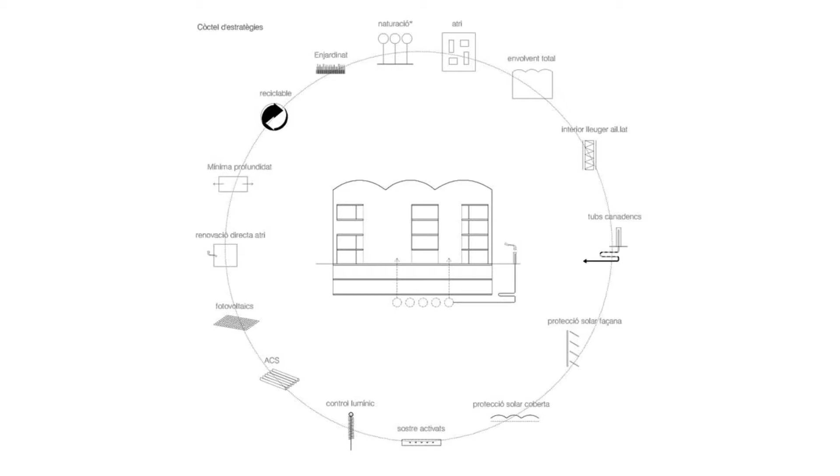I agree about that, but I think we are not concerned about sustainability because we introduce in our approach the idea of life cycling or low-embodied energy materials, that we do, or that we use passive or active strategies to gain, that we do. I think our interest in sustainability is based not in these topics, which are obviously necessary in that kind of approach, but we are concerned about sustainability because we understand architecture as support for living.

The use of architecture is the first strategy in terms of sustainability. It's not the object itself. The objects are sustainable or unsustainable not because of the object itself, but because of the use that we get from the object. Okay?

So this is what we are concerned with: how we use architecture. And this is why we are concerned about sustainability. Because an object can become very sustainable if you use it over a larger period of time, or if it's used by a lot of people, or if it's used in a second life. So these are three examples about why sustainability is not about the objects, but about how we use the objects, and how we use architecture.

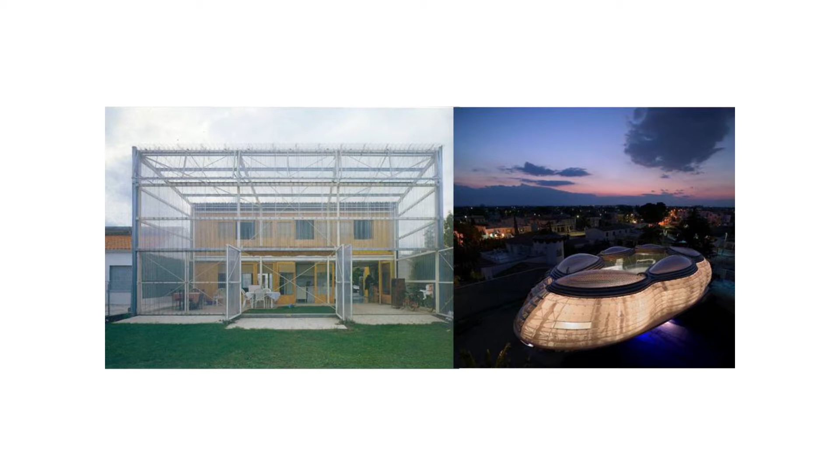So all those examples, I think, are questioning those topics about habitability. And of course they are talking again about sustainability, but this is just a consequence. What is interesting is that we have to question ourselves about how we live in our buildings.

So I've shown you this picture on the left side, which is from Lacaton & Vassal again. When I explain what we do at the office, I use a Lacaton & Vassal concept, which is that we try to offer a large number of spaces which are specific in terms of conditions, not in terms of use.

So houses or public buildings that offer different kinds of spaces, but not specialized spaces. Special, but not specialized. The difference is incredible.

There's a sentence from Lacaton & Vassal which said something like, function compromises freedom of use. So two classical topics of modern architecture: functionalism, and the idea of program as a strategy to design. From Lacaton & Vassal, this is against freedom in the use of the spaces.

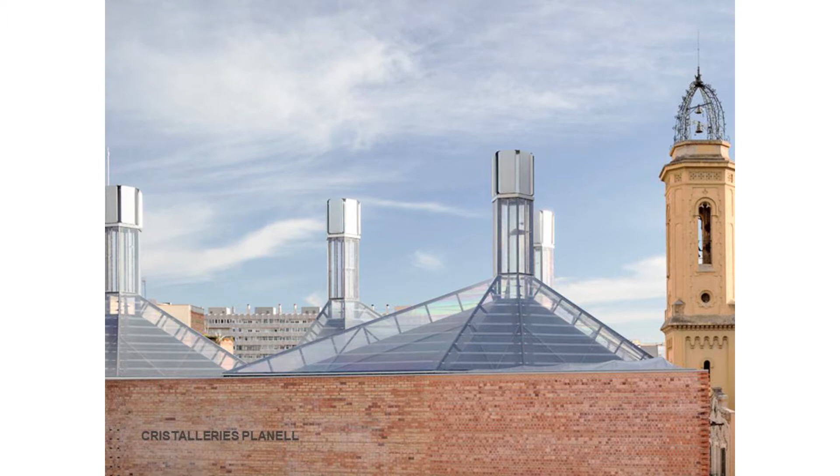The first of the projects is this, the Cristalleries Planell. This is an academic school for adult people. It's a public building, very small, placed in the center of Barcelona in a terrible plot, because it has a difficult geometry, a narrow triangle that belongs to an old huge factory, but the factory was like 10 times bigger than that final plot that has ended up here between the new streets.

To explain deeply that idea of how to give conditions to the air, let me explain the basic strategy of the building. This was a competition in 2010, and our strategy was very simple. There were just two conditions: the plot was a triangle, the program of course, and you had to take care of an old facade that was part of heritage—this old facade of the factory.

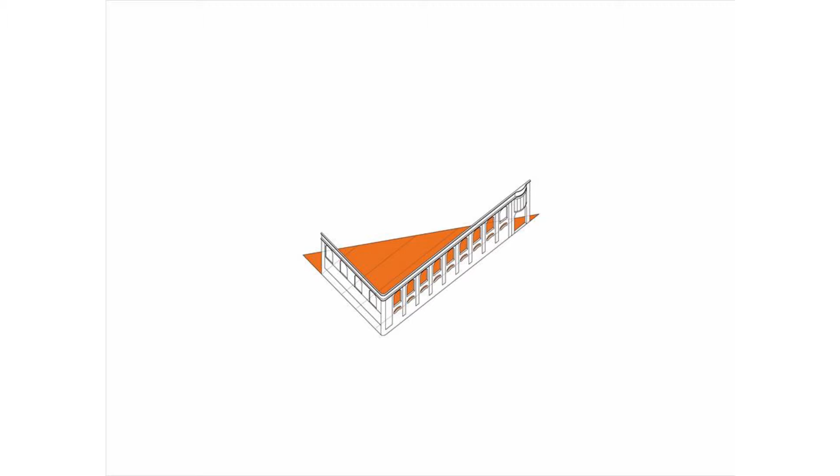That facade covers 2 of the 3 facades of the plot, so it's difficult to deal with. Why so difficult? Because the program of the building is basically classrooms, and classrooms need natural light. The old facade covering the main south-facing facade has holes that belong to a factory with an industrial logic, so it's very difficult to mix with the needs of classrooms.

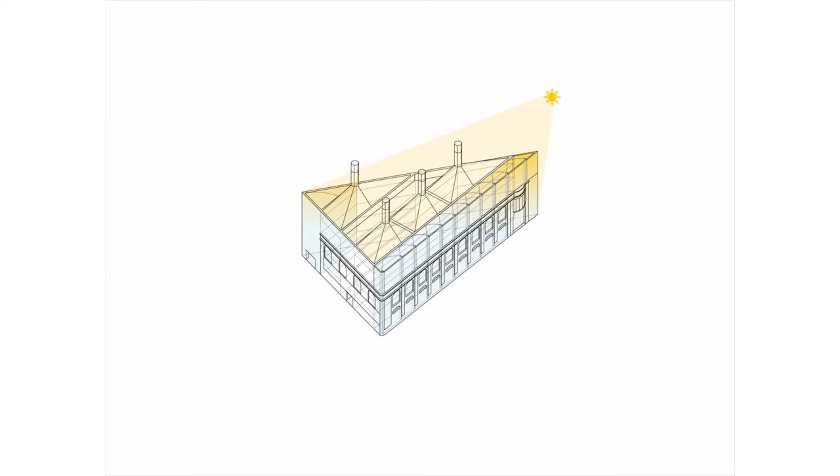That's why our basic strategy was to step back twice and let a patio sit between the old facade and the new classrooms. This patio was just to get more natural light from the ceiling, and also to mix the two kinds of holes that were on the old facade. After that, we decided the patio would be transformed into an atrium.

The difference between the patio and the atrium is that the atrium is a natural system—in wintertime, as we have a lot of internal heat from adults in small classrooms, in terms of heat and also smell, this becomes natural heating. You are natural heaters, so the winter strategy is to stay close and get fresh air from this atrium, which acts like a greenhouse keeping the air a little warmer.

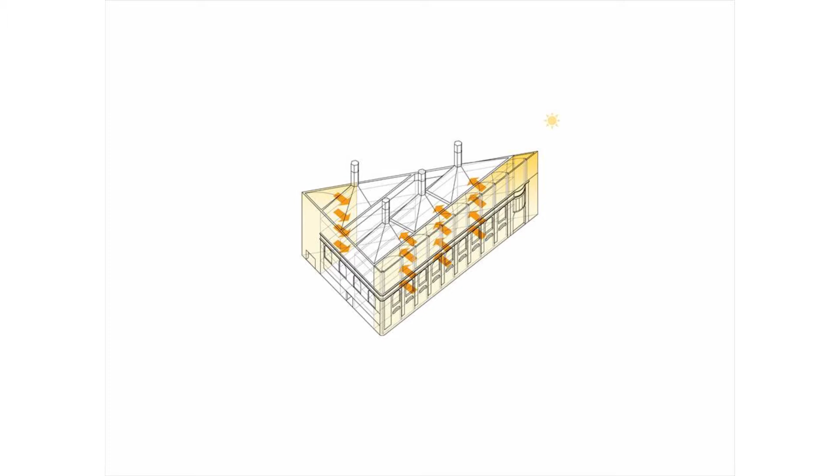In summertime it's the opposite—you have to move a lot of air because the internal heat has to be avoided and taken off from the building. So basically, the strategy of the building—you'll see the shape and geometry is very Euclidean—but in fact it's about giving qualities to the air: qualities in terms of movement, direction, temperature, humidity, and also natural light.

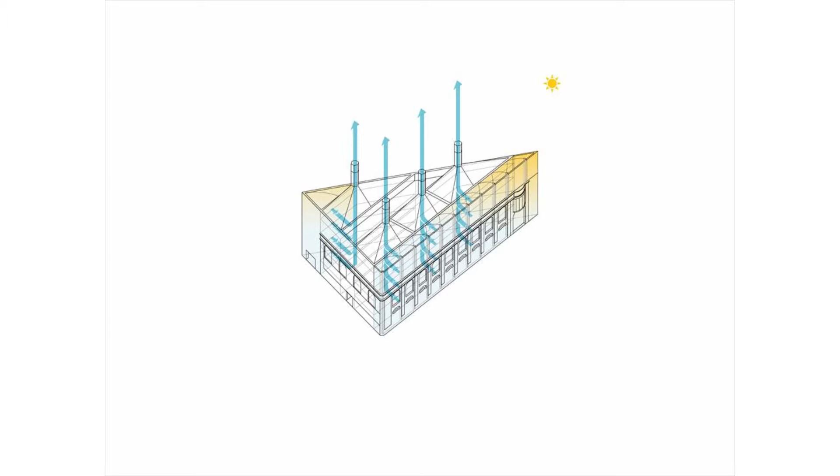So time, as I was talking before, how important time is, can be explained in 4 parameters—4 vectors, sorry, I have to be serious in front of engineers. The first vector is time as use. The idea of use is impossible without time. We use buildings, we don't use sculptures. Well, not all the schools of thought agree.

You know the sentence from Dalí about a sculpture—well, at least a sculpture cannot be moving, that was Dalí's view. Calder, you know Calder, the sculptures from Calder that move? Dalí sent him a letter saying, please don't let your sculptures move—at least what you can ask of a sculpture is don't move. So, sculpture is not about time, but buildings are about time.

So what is the use in this case? The use is about flexibility in terms of future. This is a public building. During the process from the competition to the final project, the use changed—at the beginning it wasn't a school for adults. So our basic strategy was to develop a public building, not specifically an adult school, one that can be transformed in the future.

That's why we put the structure in one sense, not in the other—just a middle corridor, which is the easiest way to have access to the maximum number of programs and so on. So the building is basically that pattern of administrative part and classrooms, repeated on every floor.

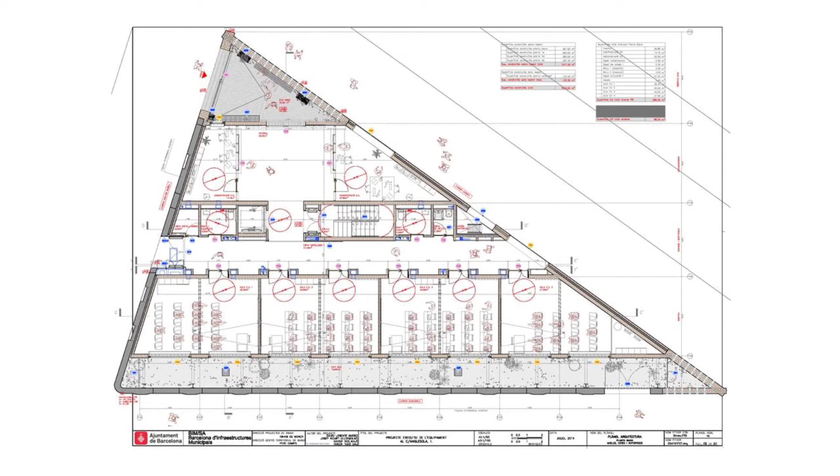Well, this is not really important, but time is about use. In this case, it was important to make all the users understand that they were not the important part of that building, because this is a public building for everybody, not only for the specific users who will be here for certain years—maybe just 10—but a very heavy building that will be here maybe for 100 years.

The second vector for time is the obvious one: time as memory. When you talk about time in a case like this, dealing with heritage, something from the past, you have to talk about memory. But for us, to talk about heritage, something already there, is not to talk in terms of culture—it's not about composition or cultural or historic values. It's to understand how useful this material already is. You have to do the calculation necessary to understand if this old wall is still able to support something, if the wideness of the wall gives us something in terms of inertia or humidity control.

Okay, so that's our approach to heritage. Of course we also have an approach in terms of culture, but the first and obvious thing is to understand that in terms of embodied energy, this is energy embodied in that material that can be used again. So we have to understand this not as a cultural example, but as a structural wall.

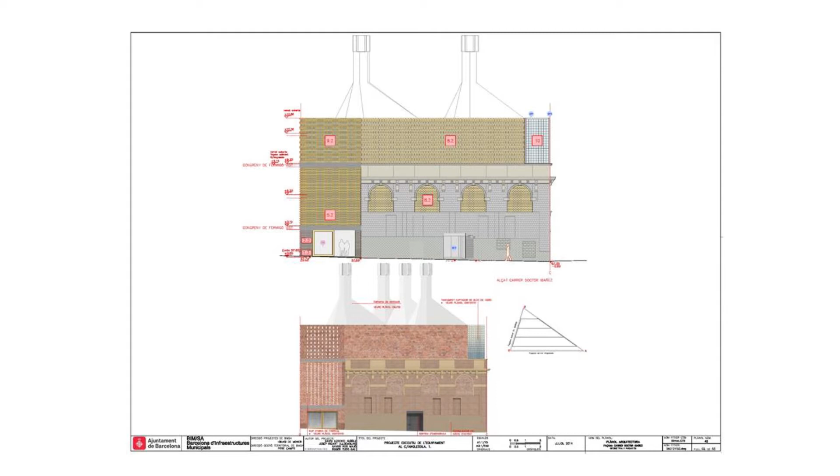So what we did in this case was to see if the wall was still able to support another floor, how wide it is, and how it will help that patio to give inertia and control humidity, how the holes were in terms of natural light, and so on.

So we are using the wall not as a sculpture, but as part of this patio, which is the basic strategy in terms of thermodynamics and comfort of the building. Working as a greenhouse, working as a mass, and also as a structure.

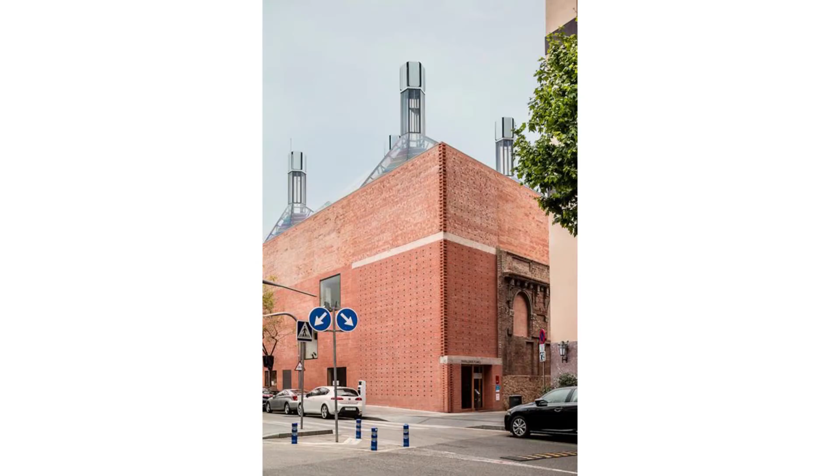Time is performing. Time is about performing. This is difficult to explain, but for us it's the basic and most interesting part of that kind of strategy. So the structure not only performs supporting - the structure, in this case, performs giving shape.

This is structural walls. This is something very uncommon also in Spain. I suppose in France it's very uncommon too, especially in a public building of 4 floors. It's not really common, neither in Spain. But this is a very good strategy, thanks to the structure - at the same time that you're supporting slabs, supporting program, you're giving shape to the spaces.

But in this case, you're giving shape to the air of the patio, but not only the patio. Also the structure decides the geometry to allow the pipes for the air that go to the roof and come from the basement, and so on.

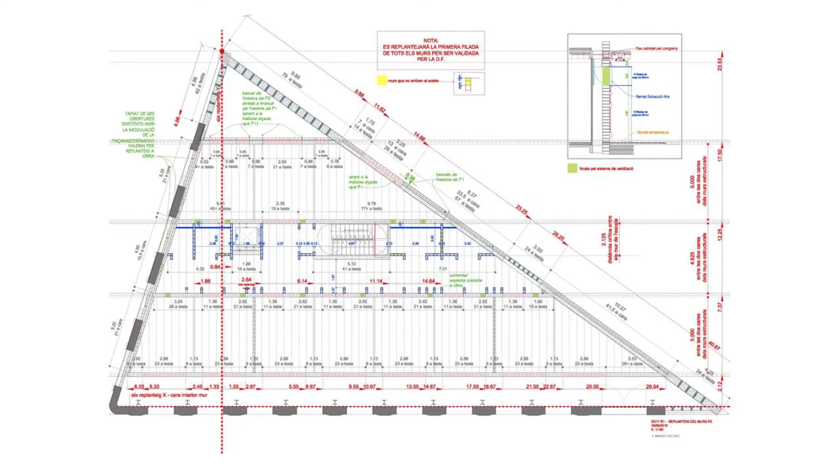But also the structure, because it's a massive wall, as used to be the old factory, is giving inertia, it's giving conditions, it's qualifying the air. Inertia is that incredible invention that assumes the excess of heat and gives it back when necessary. But it's the same in terms of humidity, if the product you're using has pores, like wood, like bricks, without any kind of coating.

But also the structure can perform giving shape to the pipes, to the installations, and also giving inertia in the slabs. Because when you're talking about these thermodynamical strategies, when you're using massive walls to control comfort, you have to assume that you cannot coat, that you cannot hide that kind of walls.

So the installation is going to be seen - something that is not happening here. All the installations are hidden, isn't it? So are the ceilings, the roofs, and so on. In that kind of building where all the mass helps control comfort, then the installations cannot be hidden.

But then you have to assume that as an architect, as a designer, you have to design the shape, the aspect, the look of the installations. And this is something I have to say to you is impossible - forget trying to control all that. What you can try is to give patterns, to give instructions.

That's why we did that kind of bizarre slab, because that shape hides it in a visual condition. You see the classroom and the basic pipes get a little bit hidden, but it gives clear instruction to the installer. We gave them just instructions: the first corridor is for that kind of pipes, the second is for that kind of installation, and so on. So instead of giving final shapes, we gave them a pattern and instructions, like a game.

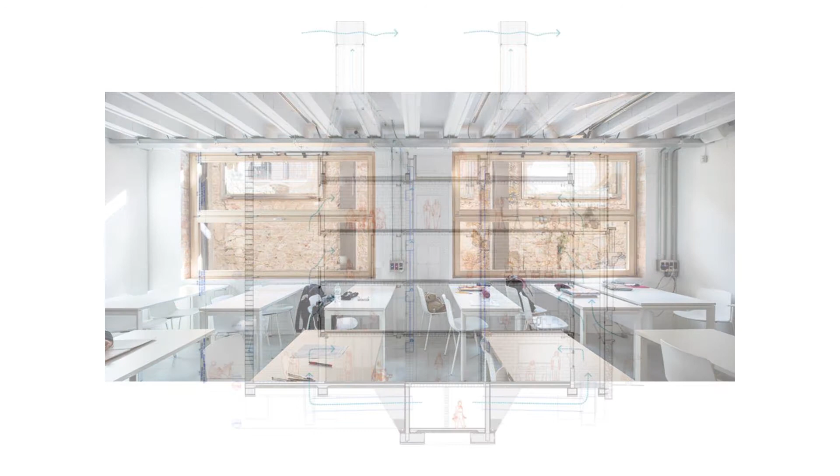It works pretty well. Okay, so that's the basic performance of the building. The air comes from the basement very slowly - let's take it very slow. It's a slow air, it's like slow food, it's like everything has to be slow. You know how we Spanish are, isn't it?

So take it easy, okay, it's a take it easier system. Does it mean that when you work not with pipes, but with the spaces as the way of the movement of the air, you don't have the feeling of movement, okay? Which is far more comfortable than to have the feeling of a rush of air from a pipe. You know what I mean?

Okay, so this is about windows, not about holes. This is about the space, not about pipes. So the air moves from one space to the other, always getting from the inertia of the concrete walls, the basement, the old walls, or all the structural walls, getting conditions in terms of temperature and humidity.

Of course, with that passive system, it's not enough. In certain days of the winter and in certain days of the summer, just with the pure inertia, it's not enough. So the pavement is an active pavement based on geothermal energy that gives the point of heat in winter and gives also the point of cold in summer, okay?

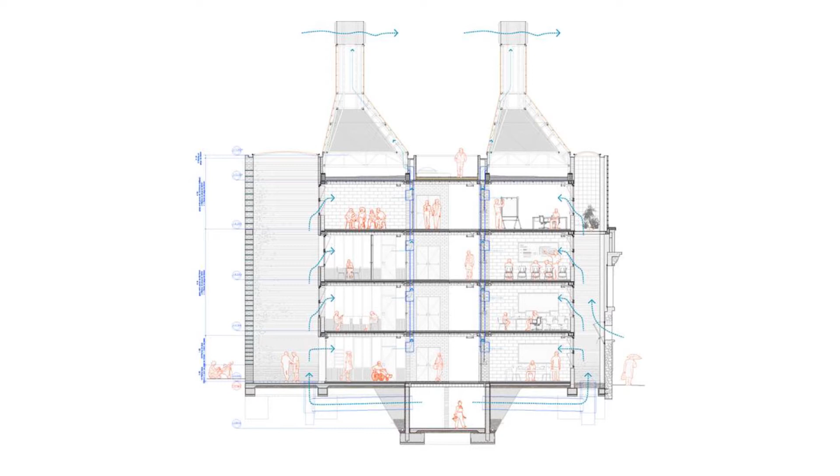That means between 9 and 11 times per hour, all the air of the classrooms is in movement, just with a natural engine. This is a complete natural engine based on 3 different systems.

The sun chimney, which is a physical, very easy concept to understand. If you come into YouTube, you will see very simple, funny inventions to do sun chimneys with your sons. Do you have sons? No, I have sons.

So it's very simple as a concept. What's very difficult is to check if it's possible to move the air 11 times per hour. The concept is up to the architects - it's possible because the concept is very funny.

I want to move a lot of air in summer. But in winter, what I want is to keep you warm inside the classroom. So in winter, I just want to move the minimum possible. The sun chimney is a perfect invention because in summer is when it works, when it gets really hot.

And the depression is incredibly strong and moves lots of air. But in winter, there's less sun, the sun goes lower. So in winter, the sun chimney works like shit, but that's perfect for the project because in winter I want you warm into the classroom, okay?

So as a concept, it came from the architects, but as a simulation, as a calculation, as a process, it came from the engineers. Not all the engineers are like demons - there are fantastic engineers that want to recover for architecture, for natural comfort, tools that traditionally for them are being solved by machines.

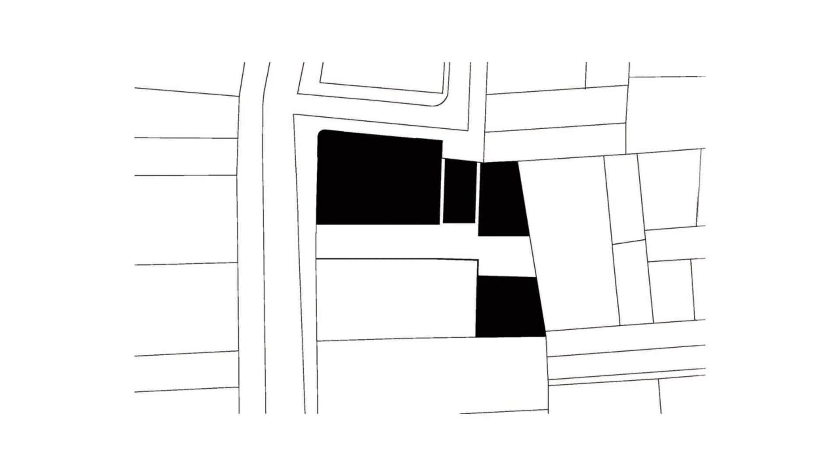So what we discover here is that part of the structure, part of the original spaces, are less useful than others. So we demolish this part, trying to create like a street into the building. But it's not a street, it's an invention that performs in terms of passive strategies, qualifying the air in terms of natural ventilation, cross ventilation, temperature, gains of the sun, and so on.

So this is a drawing from the competition explaining how we keep part of the building and how we demolish part of it, giving new conditions, keeping the old conditions for the spaces that are still useful, and getting new conditions with this new street that crosses the building. It works like a greenhouse and so on.

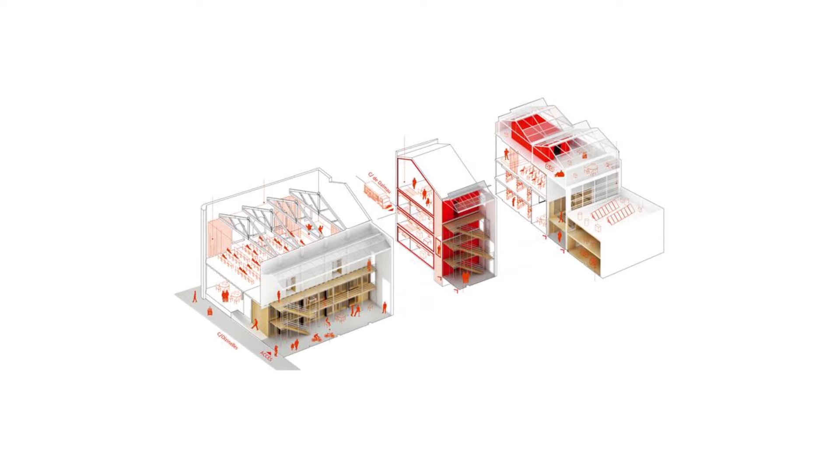So we get that part for the non-program, for the unexpected, but it's very clear in terms of passive design, because it's a natural engine that moves the air to the top, giving fresh air to the whole building. But in terms of program, it's the unexpected, assuming a new way to put in order all the circulations of the building.

Thanks to that new way of circulations, the old parts that we keep there get cleaner, because the circulations are out of the old parts and are assumed by this new street.

Because this is a demonstration that urbanism is from bottom to top. When a building is a real complaint from real people, when it's 40 years of people asking to recover that building for society, then the success is for sure.

It doesn't matter how necessary the program is or how necessary the rehabilitation of a heritage building is, if the decision comes from the top down, it never works. This is an example of success.

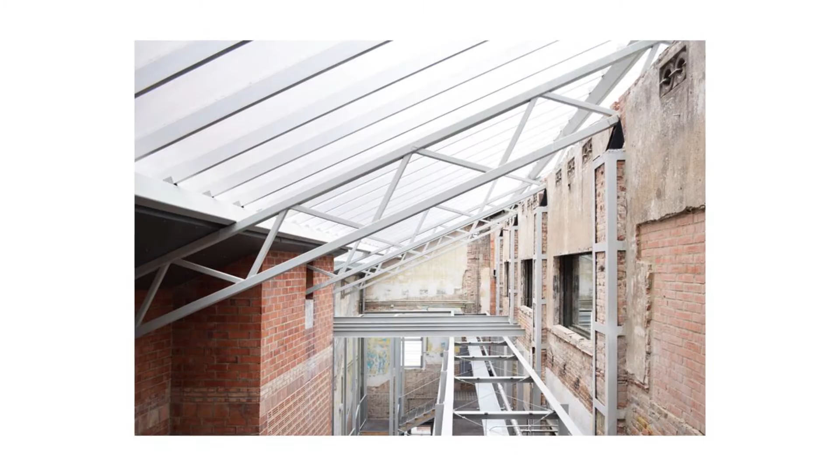That's the ceiling and so on. Well, that's the old part, what we keep there, just trying to take advantage of the original conditions.

So that's the opposite a little bit. On one side, new conditions for the air, thanks to the strategic demolition, and on the other side, taking advantage of the original conditions of that kind of walls, again, inertia, and so on.

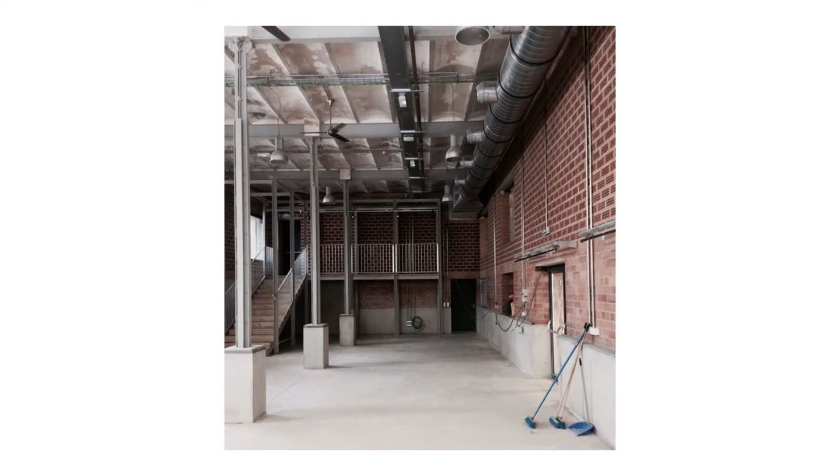To assume it's a very old-fashioned structure, we've done the calculation. We have assumed the risk to say that the old structure can stand up with certain new structural parts, but it's basically the original structure standing up the new program.

Okay, that was the first strategy. Second one, which gives the title to the presentation, from elemental to fundamental. What does it mean? This is not our stuff.

This is, for me, my favorite building in Barcelona. If you never came to visit us, I give you that advice, to visit this, which is the library at the UPF University.

It's also an open building, you can visit anytime you go there. It's a very old building, just an infrastructure to keep water, it's like an infrastructure, okay?

Now it's a library, the library of the UPF University, close to the Ciutadella Park. It's an amazing building. It's that mix between an old brick infrastructure with that new lecture done by Clotet Paricio, which are a pair of very good architects.

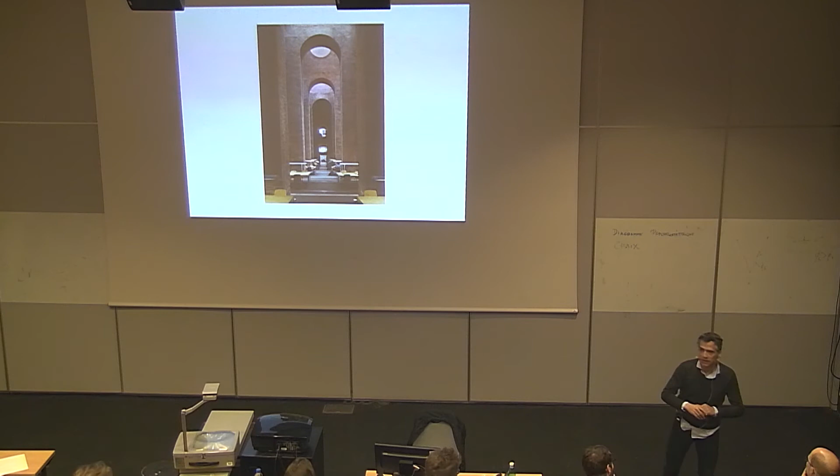Why do I present that image? To explain the idea of what I call going from elemental to fundamental. I don't know any designer, whether industrial designer, architect or engineer, who doesn't assume that in a design process you have to consider as many inputs as possible, all the demands and all the availables possible.

What does that mean? At the beginning of a design process, you try to understand and put together what the customer is asking, the program, the norms, the laws, the budget, the conditions of the soil, the conditions of the climate.

You also try to understand all the availabilities, the resources, the advantages, the opportunities. This is what we try as designers to do - a very complex, strategical process where you put together all the demands and all the availabilities and try to figure out what strategy can put it all together and solve the demands.

What I think is a very common strategy in all our projects is, assuming all that, to try to give the answers - I don't like the word answer, but let's say that - using just the basic parts of construction.

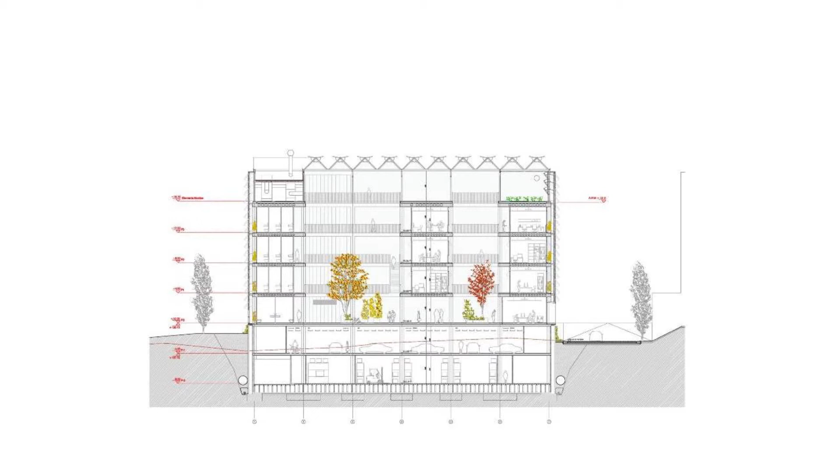And on the inside is just a concrete structure. So basically, all the building works in a passive way. The whole building works in a passive way, so all the intermediate spaces, which are meeting spaces, free program spaces, are just passive climate design.

That means there are lots of secretary people, administrative people who work here, who really hate us, because to go to the bathroom, sometimes it's not as warm as it should be. But we assume that we are not the kind of architects that can give all the level of comfort that people are waiting for. It's impossible. So we have to assume that there are some uncomfortable moments, not spaces. There are moments of uncomfortability.

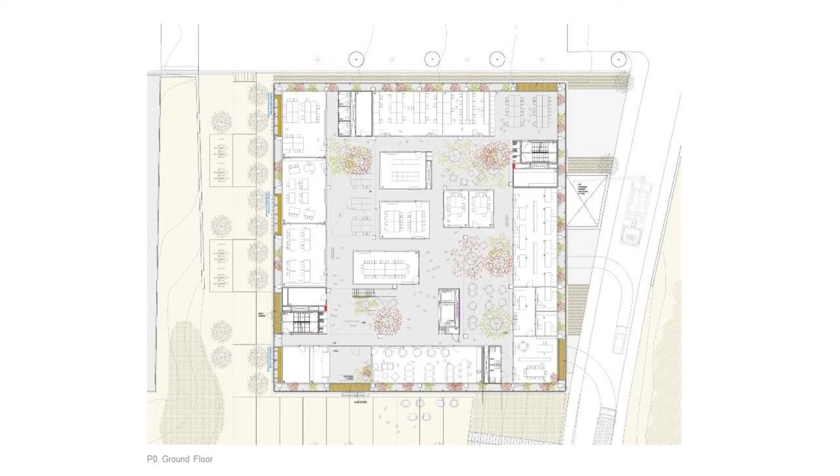Well, all the parts that need an extra level of comfort are the non-dynamic spaces, which are in the boxes of wood that have a level more of comfort with active systems.

So the strategy is again very simple in terms of thermodynamics. In winter, the greenhouse has to be very closed and works as a greenhouse, getting gain from the sun from any of the facades. So through CFD simulations, and with natural engines like the roof, the corridors and the basement, we move the air in a natural strategy, taking it from the hot facade and putting it in the colder spaces.

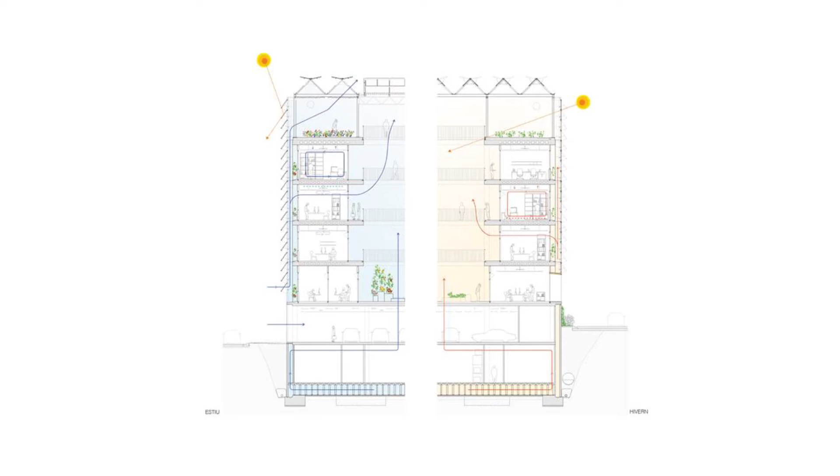This is very natural, the air by itself tries to compensate, so it's not really difficult. In winter it's a greenhouse working as a greenhouse. In summer it's the opposite—it's like a porch, like a shadow. The whole greenhouse opens with an industrial system, repeated every meter, to open the whole facade and move as much air as possible.

So the two parts are clear: the structure and the enclosure. The structure here is something forever, based on concrete—it will be here for ages. You have to assume that concrete, in terms of environment, is not good. A lot of CO2 in the process.

Really heavy. But like the old car that I showed you, the Chevy, the big car in La Habana, it's as unsustainable as the concrete. But it's been in La Habana for 70 years, so every year it's getting less and less unsustainable. It's the same for concrete.

If you assume that you have the concrete, what you have to ask the concrete is to perform as the superstructure—it has to be there for everything, so it's not just the structure. Lots of inertia, a 40 centimeter slab. But as it's a 40 centimeter slab, it's too heavy.

So we put pipes inside, which take off some heaviness, and at the same time, through these pipes, we can take off the heat, not only on the surface but also inside. And at the same time, if opening the windows isn't enough, fresh air also moves through these pipes and goes to all the offices. At the same time, with the shape of the surface, you get better acoustic conditions. Everything is in the structure, in the important part of the building.

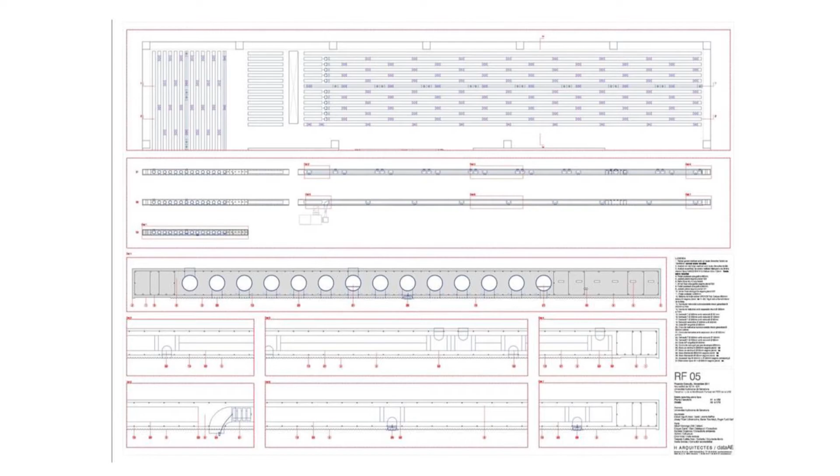So also the active system—the pavement is also active, and the slab is also activated with hot water and cold water. That's the pipes that are inside the concrete. That's the cheap way to give shape to the concrete, because it's a very basic structure, a very cheap concrete structure.

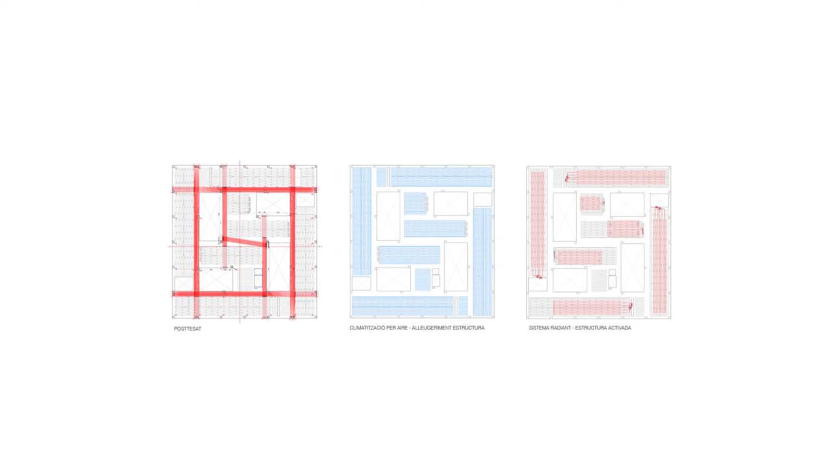Full of, we're asking to perform in a lot of ways. So that was the super exciting moment in the process. That was like being in a futuristic movie.

Every day, people taking sizes to put the post-tensioned system in its place, the pipes. You can see here all the pipes for the heating system, for the cold system. Well, it was beautiful, an amazing moment. For the structural part, suddenly something which is just a concrete structure that is hidden, I don't know where, suddenly becomes everything, giving conditions to this space. This intermediate space, the quality of the air is based on the qualities that the structure gives to the air, in terms of active and passive, acoustics, everything.

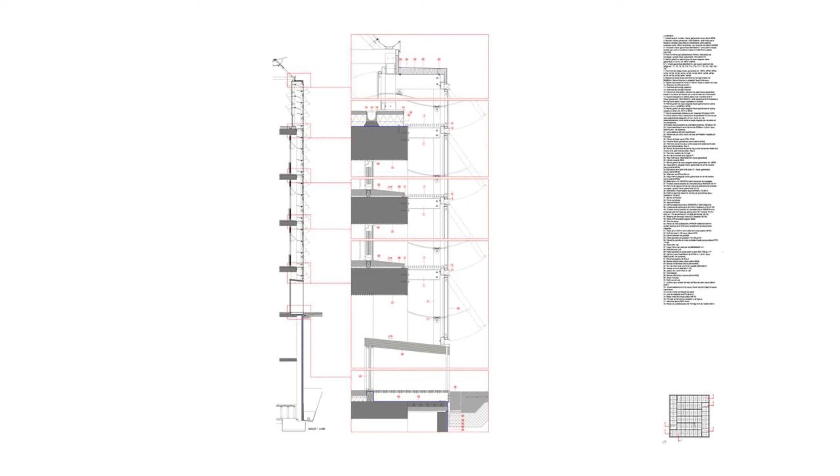The second part is the enclosure, the greenhouse system, which is that skin that surrounds all the section. I insist, catalog system, but reviewed. Because it's not very common in greenhouses to have the same window system one over each other. But it's as simple as just repeating it.

The greenhouse culture is amazing because agricultural is not about thousands or millions of euros. Agricultural is about taking advantage of 1 cent per hectare. So they have to be very smart. They've shown that they are smarter than the rest of the people. The greenhouse systems from 20 years ago already have domotic systems, very cheap domotic systems, to close in case of rain, to open in case of temperature, and so on. Already now it's difficult to get that kind of windows as a building product, which is very cheap and very affordable in the agricultural world.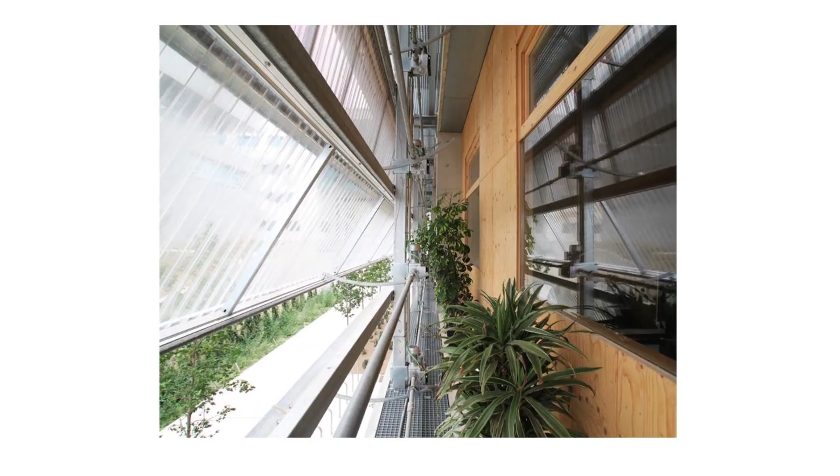Solid matter. At the very beginning, another common place when we were young was that interest about that kind of architecture that identifies, that makes the same between a structure and geometry. We call that structural space. But this is as clear and as classic as all the architecture based on structural walls. And a structural wall is a very nice example about how the structure is the same as the space.

We were very interested about that, but it doesn't mean to solve all the structures with bricks. It means to solve the structures with the structural bidimensional elements.

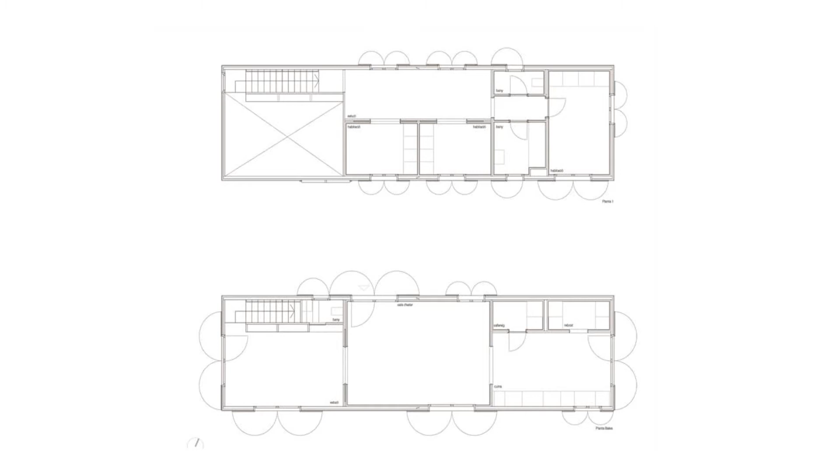So here is where we discovered the program, like this. But thanks to that product that we discovered at that moment, that is far better known in France than in Spain - by that moment, 10 years ago, it was really hardly known in Spain - which is the CLT panels, timber panels, structural laminated panels. So we did that house from the top. So what I put as an example is that we're interested in that strategy, but that strategy is not about one material. It's about that concept to identify structure and geometry. So it can be done with wood, but with a certain product.

This is the second example. This is made in brick. This is a commission that we got at the very beginning of the economic crisis, by 2007 - like 10 years ago. Typical pair, we thought, both of them with nice jobs, no sons, with a flat in property, happy.

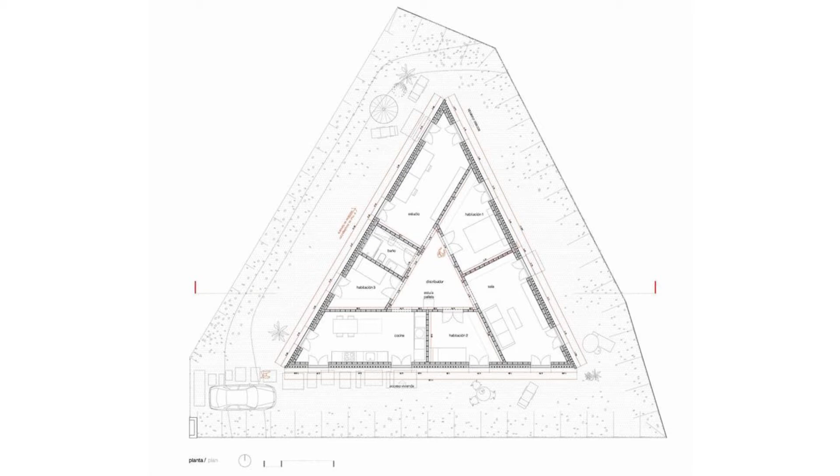They got that new plot to build their first house. They had an apartment and they wanted a new house. So it's supposed that what happens here is that they ask us not for the house that they need, but for the house about the family that they want to become. This is very common - people don't ask what they really need, people ask what they imagine they will need. One day, just based on real interviews, the average in Barcelona, like 7 years ago, it was like this.

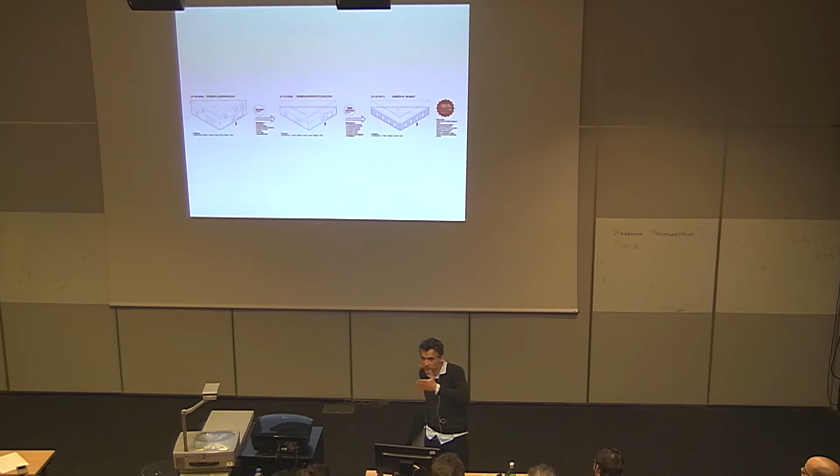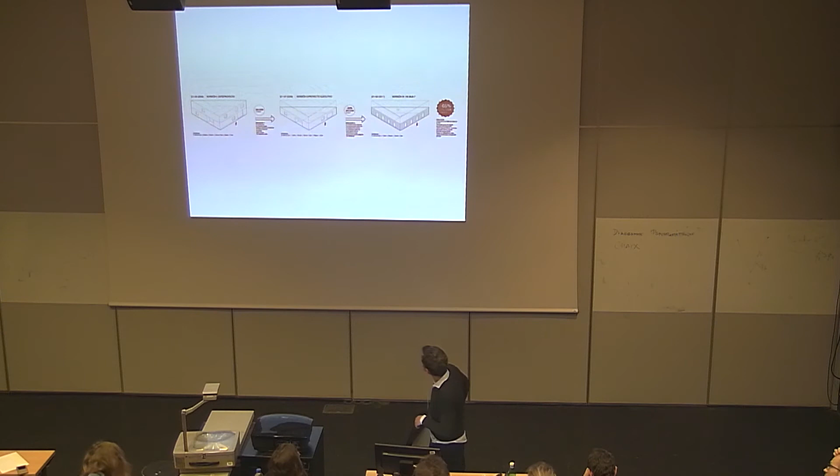So that was the first house—you see the number, 320,000. That was the cost. During the process, we discovered we were doing too much; the house was getting too big. So we proposed something smaller, simpler, easier, and the budget decreased 30%, to 230,000—less complex, just one floor, assuming the shape of the plot is a triangle, and so on.

We finished the project, got the constructor, and they went to the bank to ask for the loan, for the mortgage, okay? And the bank in 2008, 2009 said no. It was a big surprise. They got totally stunned.

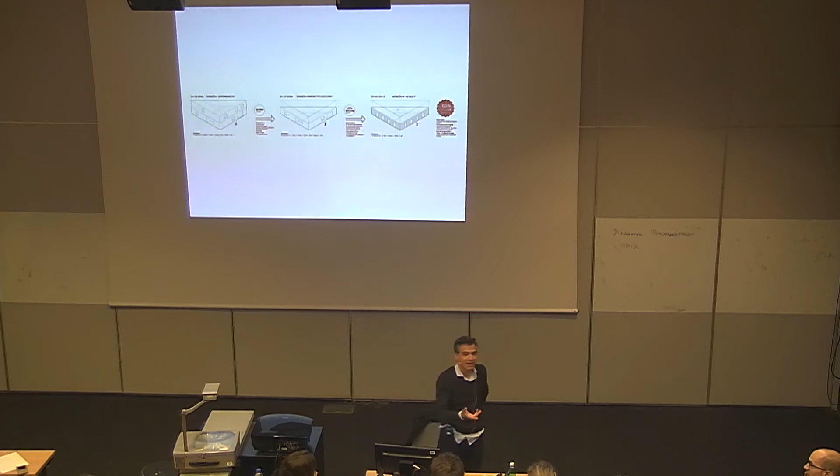Because they had a flat in property, they had jobs—there was no economic problem, but we were in the middle of the crisis. So the bank decided not to lend money to anybody. The bank told them they'd only lend half the price—not 230, but 140, in fact 125 or 135.

They came to the office and said it was impossible to build the house. Everybody was crying—I was crying, they were crying—and they decided something super crazy: we're going to buy a mobile home, put it on the plot, and in 5 or 10 years, when we have more money, we'll build the house.

So they left the office, and suddenly my partner Roger, who's like Superman, came in. He got stunned too, and asked me to call them and request a weekend to redefine the house.

What happened during that weekend was that a common house changed from common systems, multi-purpose systems, multi-profiles of workers, traditional methods, to a house built by just one person. That's the key. This house's installation systems are designed to be placed by a typical mason, a typical builder—just with bricks from the factory, from the village, from the neighboring village, from a builder in another village. Everything available in terms of geography, and just one profile of worker.

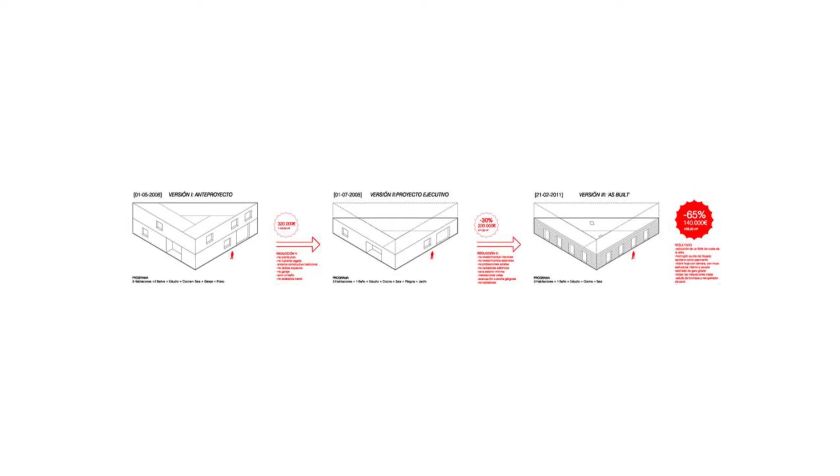That means doing detailed plans of bricks, of pure bricks, at 1/5 scale, because there's no coating—there's nothing to hide the bricks. And the bricks are as cheap as you can imagine. So you have to be more than precise if you want at least a minimum of quality.

That's how we discovered our basic concepts, because suddenly we discovered that asking the structure to perform in more ways than typical gets you less budget. That's why that facade—which is obviously ugly, but a little less ugly than without any coating—we decided to change the position of the brick, transforming the facade into a ventilated facade just by placing the brick in a vertical position.

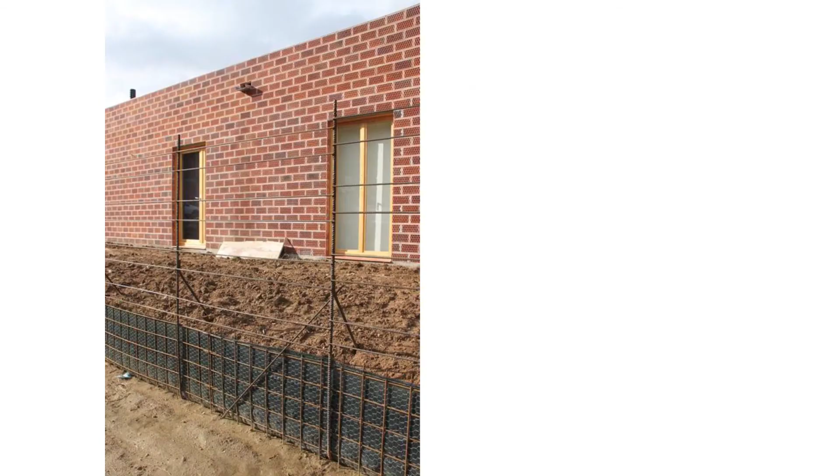So this house is the example of how—at least in our case—we dealt with the crisis. Of course, it's a house with a certain level of luxury, because it's not as cheap as you might imagine. It's really cheap, but it's not the cheapest house in the world.

It has no heating system, but it doesn't need one, because it has 12 centimeters of insulation. It has no heating system, but it has a heat recuperator. It has a lot of things, but in terms of climate, it's perfect. It has a lot of thermal inertia, so it's a nice house to live in. They are so happy, and there's nothing more than the minimum—no excess foundations, nothing else than necessary.

There's no doors, because it's not really necessary to have a lot of doors to separate spaces. So it's a minimum look. To show the bricks like this in a minimum look, you have to really be there all the time with the workers, deciding where, because this is the cheapest brick in the Spanish market.

Well, and the last example, this is a very new house that we finished with a different material. This is a concrete house, but not a common concrete house. This was a very beautiful example, a beautiful plot in a place called Ullastret in the Costa Brava, a beautiful village, old town, like La Provence but in a Catalan version, which is better. The plot just had one reference, a stone wall that surrounds the plot, and it was the clear condition of the place.

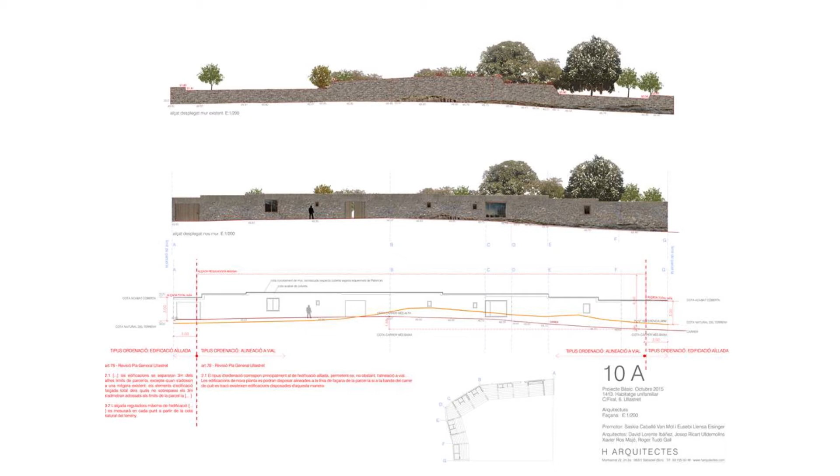But when we went to the city council, they called us and asked us to demolish the wall because they needed the street a little wider, since cars couldn't do the corner. So per law, because it was on the council plans, the street had to get wider, so the wall had to be demolished. We cried again, but we found the strategy through that.

This house consists of demolishing the wall, but everything is done with the old stones of the wall. The new concrete is not a typical reinforced concrete, it's a concrete without any steel inside because it's full of huge stones. The old stones of the wall became the new wall mixed with cement, but not a common cement, it's limestone cement. You know lime? So the lime cannot be mixed with steel because it doesn't mix well, so it's a wall that just works in compression, pure compression.

Don't do it at your houses, please, it's dangerous. It couldn't be done for more than one floor, okay? It's just a one floor house. So after the process, you can see from the image what we did to show again the old stones, which is a monocomponent wall, okay? So it's like a cave.

You have to, it's a weekend house, not a first house. Because you have to move from the courtyard to go to the bedrooms, or cross the bedrooms to go to the other, so it's really a summer house. It's like a porch, a pure porch with old stones at your back, okay?

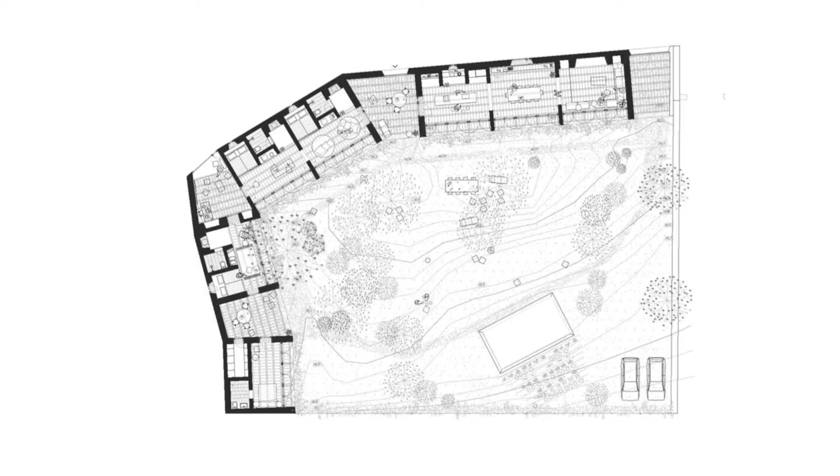Well, I have to say it's the best place I've ever been. To be invited there, well, I know my experience isn't very large, but to be invited by people who are happy here and want to invite you to have a barbecue, and the feeling of the stone and the temperature based on those very natural systems, in terms of comfort, I've never been in another place like this.

It's really, really strict, really austere, as basic as the other one, but that material takes the color of the place, because the stone is of the place. The sand that we mix with the lime is also from the plot, so the color is the color of the plot. You see, there were enough stones to do this pavement as well.

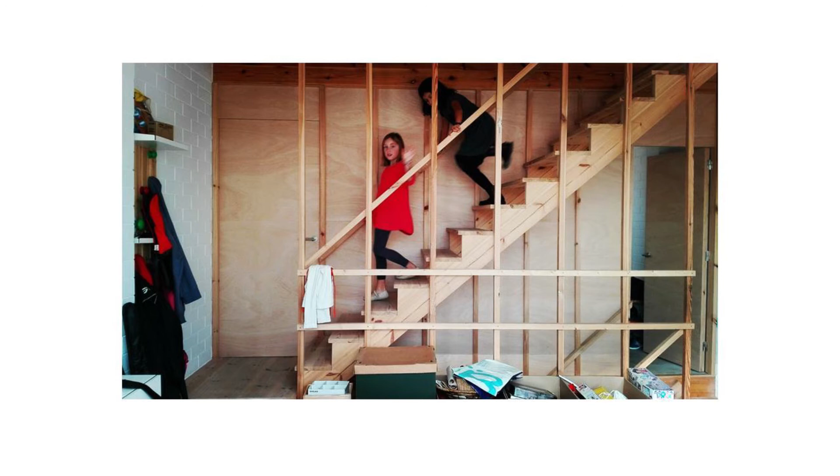Well, just to end, sorry, maybe it's too much, just the last project, that concept of the nature of the building. When I've been talking about going from elemental to fundamental, it's only possible if, when you ask something to perform, you have to ask it to perform in the nature of the product. You cannot ask a piece of polycarbonate to be structure, inertia, and geometry. You can ask that of a brick, because in its nature, all these performing roles are possible, okay? So in the nature of the products, we can find that strategy of performing.

But the building itself, in its nature, by the program, has to make natural the performance of people. So what I was trying to end my presentation with is coming back to the first concept, which is that we're just designing support for living, not living itself. But we have to design conditions that sometimes aren't visible, but strong enough to give conditions for good living. This is a residence we've done for students in the place where we teach, which wasn't simple, because it was a competition.

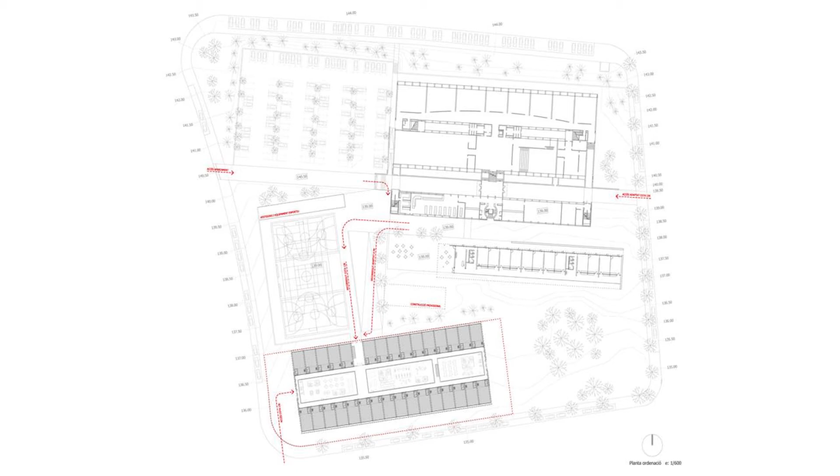We won the competition by explaining that we were the team who placed the largest number of bedrooms in the residence. The basis of the competition asked for a studio, a student's room, a gym, a coffee place, and something else. We did nothing of that, just bedrooms, full of bedrooms. This is something the jury really liked, because one of the jury members was the constructor and manager of the building. So a larger number of bedrooms meant larger benefit, okay?

But why did we do that? Not because we are bad people, we are good people. But because in front of the building there was a school of architecture with studios that open all night long and with a cafeteria. What sense does it make to repeat that program in smaller form? So this is based on a symbiotic relation between the residents and the architectural school, okay? Not only because of the program, but also because of the energy.

Our school has a huge boiler system for the heating system. And when you need the heating system in the school, in the morning, that's when the school is basically used. But in the residence, you need the heating system at night. So our competition proposal said that we won't place any heating system in the new residence, that we will use the heating system of the school at night, okay?

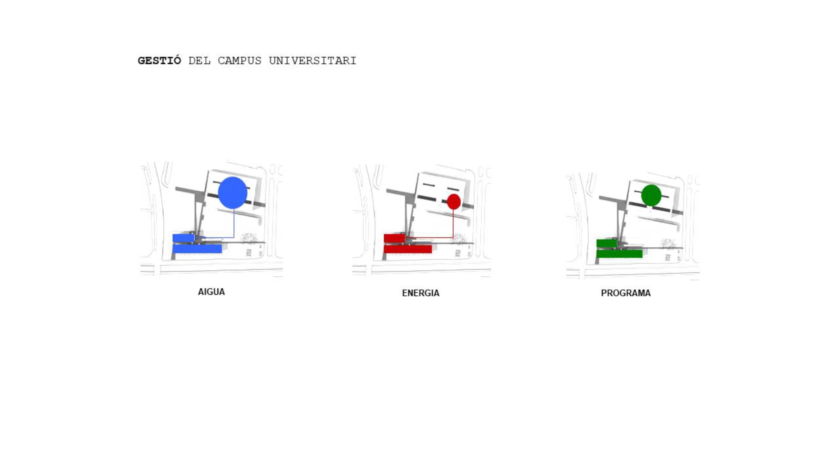So this is about the nature of that building, in terms of performing, in terms of energy, in terms of section. We did that building, and we won also because there was no elevator, because we used the section to give handicapped people the chance to get to the second floor without any kind of elevator system.

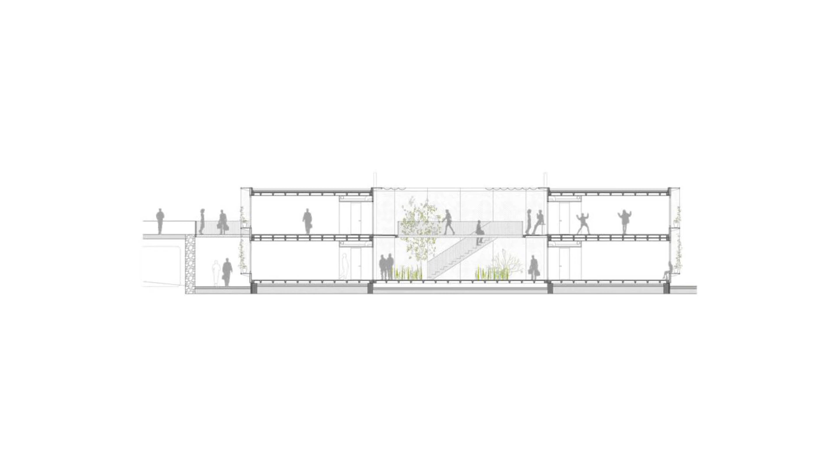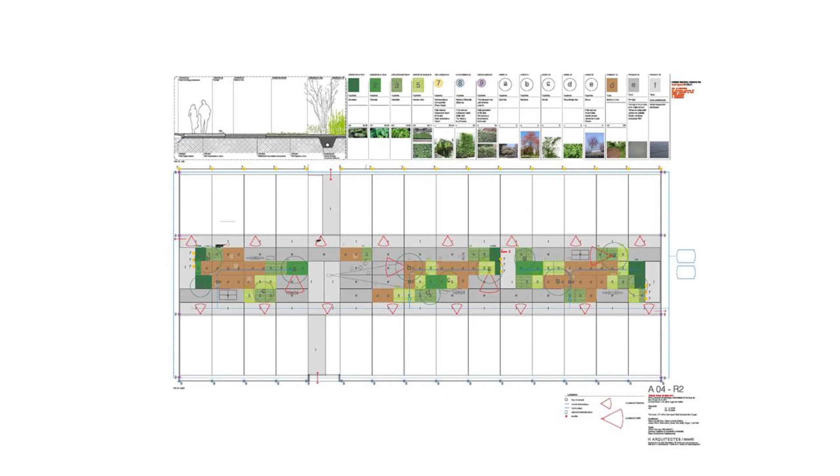We designed everything. So we are designing conditions, so we're also designing this. And now, this is what is happening. Because we're just taking decisions up to that part, but the building's history doesn't stop. And in the nature of the geometry of the courtyard is included the genesis of that garden that is now gorgeous.

Inside, the space was as austere as outside, as poor as outside. But again, it's just a group of conditions, conditions in terms of geometry, conditions in terms of temperature. But it's not life itself. The life comes with the students, and in this case, they are architectural students, so it's supposed they have some skills to colonize the space.

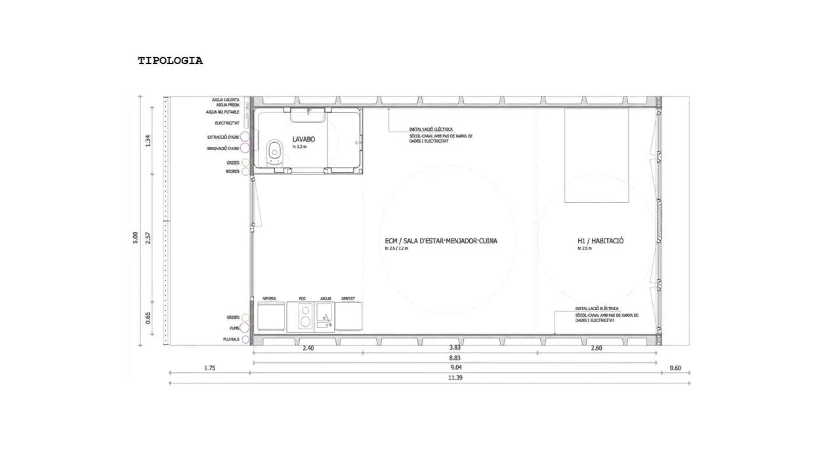So we won the competition just with that proposal: an empty space, without walls, without anything, just one kitchen, one bathroom, and nothing else, with a system of furniture that the students can rent by paying a little bit more, just proposing different ways that the conditions of geometry and the windows and so on can admit lots of different roles, lots of different ways to program the space.

But the space was like this, even the kitchen has no doors, and the space has no doors. But the students give it the final look, which, of course, my wife hates in those pictures, but I love it. And I cannot show it to my mother because she begins to talk about dust and dirtiness. But I think this is the real image, and what really gives it a certain level of charm, of interest, is that it's real. It's as beautiful as life.

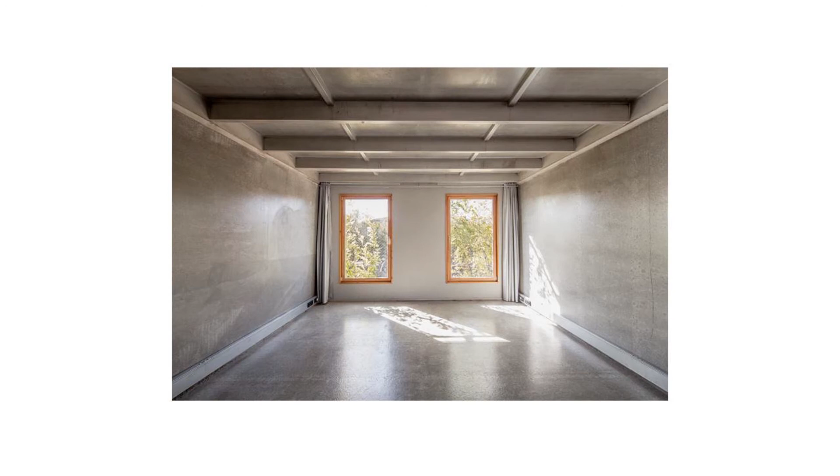And the same with the space. Okay.

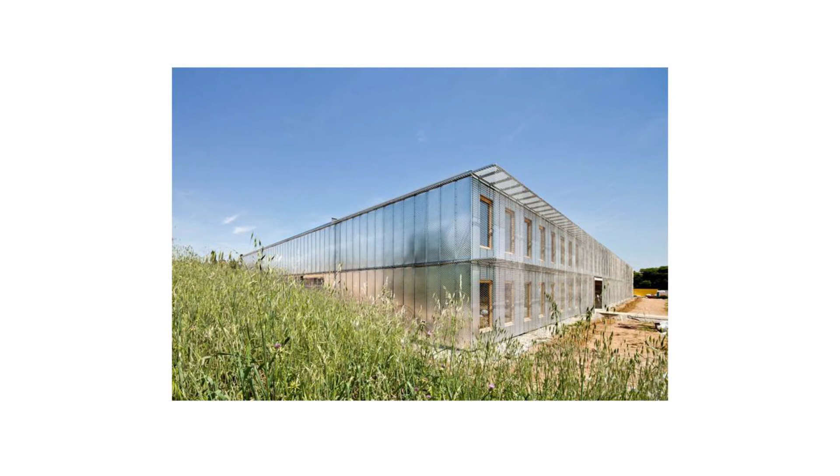So, this was our students. I don't know if they are very good architects, but in terms of jokes, they are brilliant. When we were at that point, they decided to call that building Guantanamo—you know, the American prison in Cuba—because it's really hard, okay?

But again, it was just support and certain conditions for something that happened, and it happened very fast: that kind of creepers colonized the whole facade, and now it's an incredibly beautiful green facade. So this is it—we are here just giving conditions, but assuming the whole process from the design to the life, to the real life.